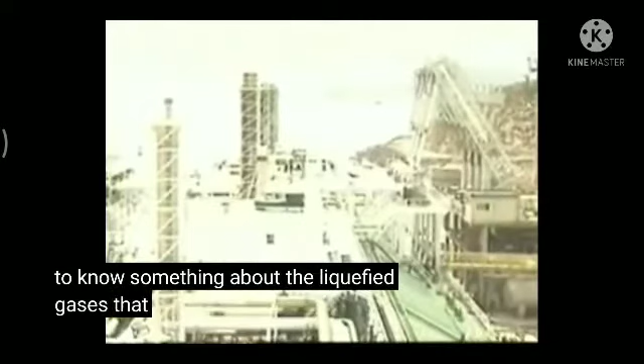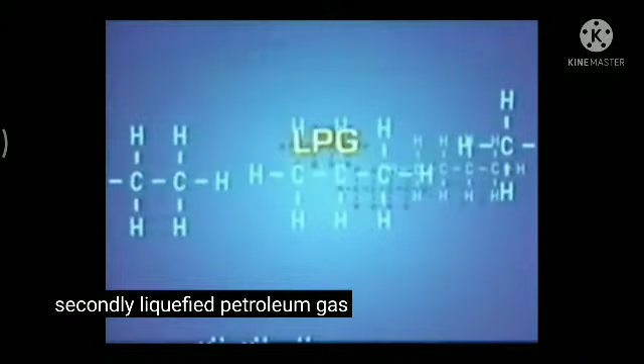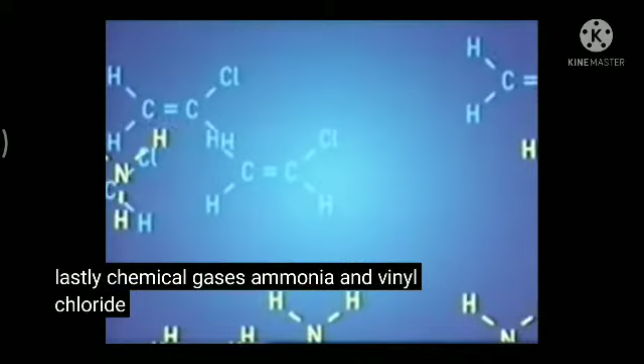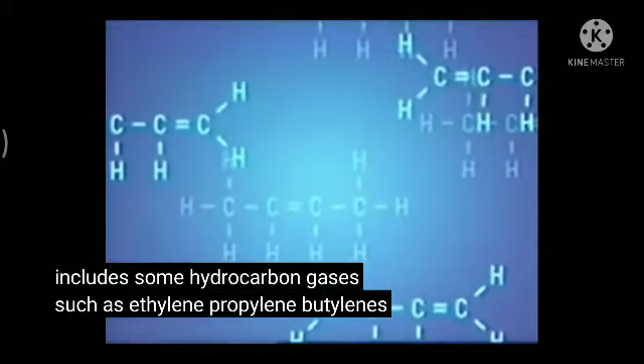To understand these ships, it's necessary to know something about the liquefied gases that they carry. There are several types of these gases. First, liquefied natural gas, LNG. This is principally methane. Secondly, liquefied petroleum gas, LPG. This is usually propane or butane. Lastly, chemical gases: ammonia, vinyl chloride monomer (VCM), chlorine and others. This group also includes some hydrocarbon gases such as ethylene, propylene, butylenes and butadiene.

Each of these gases has different properties and potential threats to personal safety. These are described in the materials data sheets that you'll find on board. The data sheet for the cargo being carried must be prominently displayed.

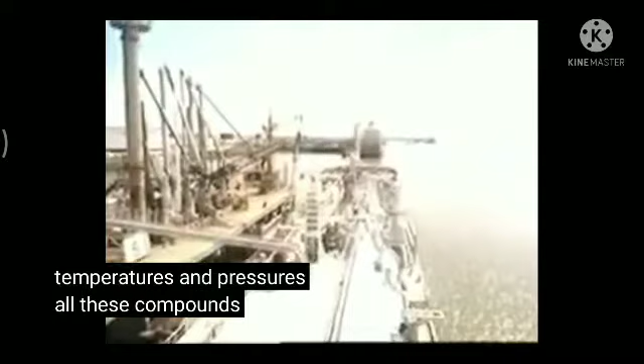These gases have different types of ship designed to carry them. One thing they all have in common is that under normal atmospheric temperatures and pressures, all these compounds are gases. Gases are liquefied for transportation because they occupy several hundred times less space as liquids.

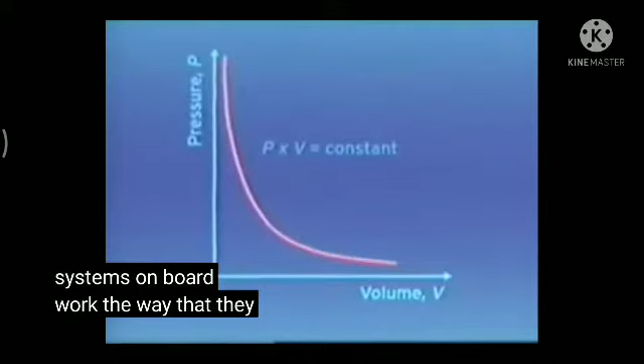Knowledge of the physical behavior of gases will help you understand why the systems on board work the way that they do. The most important thing for their transportation and handling is how these gases behave at different temperatures and pressures.

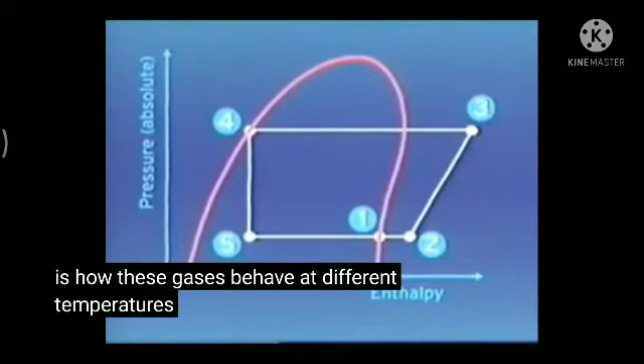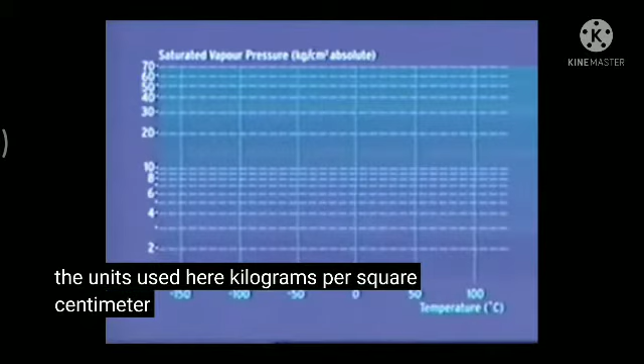This is often shown on a graph called a vapor pressure diagram. The temperature in degrees Celsius is shown horizontally, with the pressure vertically. For convenience, this is generally expressed as the saturated vapor pressure, SVP, on a non-linear scale. The units used here, kilograms per square centimetre, are equivalent to bar or normal atmospheric pressure.

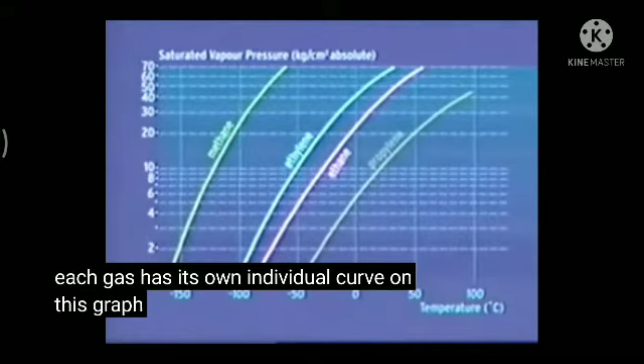Each gas has its own individual curve on this graph. Its SVP is the pressure exerted by the boiling liquid vapor of the gas within a closed container at a given temperature. Effectively, these are the conditions when the gas becomes a liquid and the liquid can become a gas.

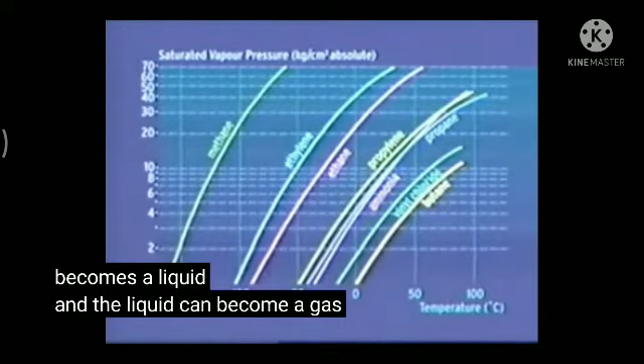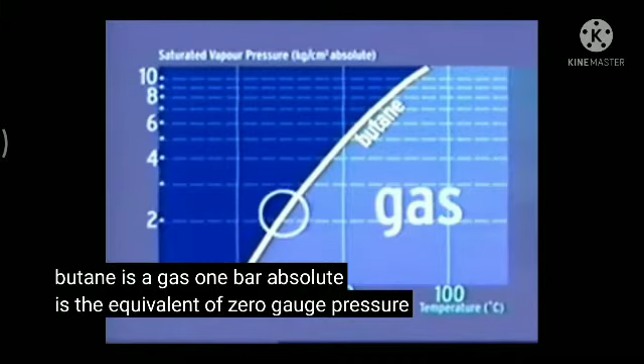This is the curve for butane. Under conditions to the left of the curve, butane is a liquid, and to the right it is a gas. We can see that at 0 degrees Celsius at 1 bar, butane is a gas. 1 bar absolute is the equivalent of 0 gauge pressure. If we go up the curve, we can see that a pressure of 3 bar is enough to keep it a liquid at temperatures of up to 30 degrees Celsius.

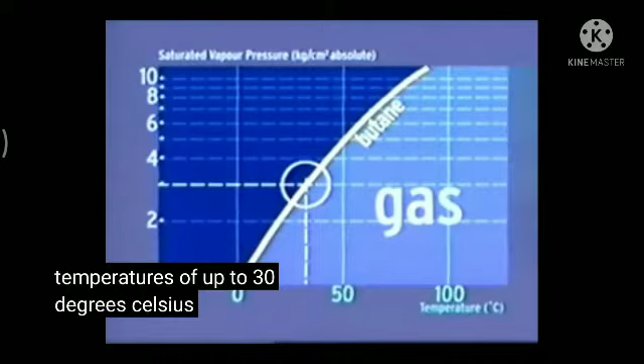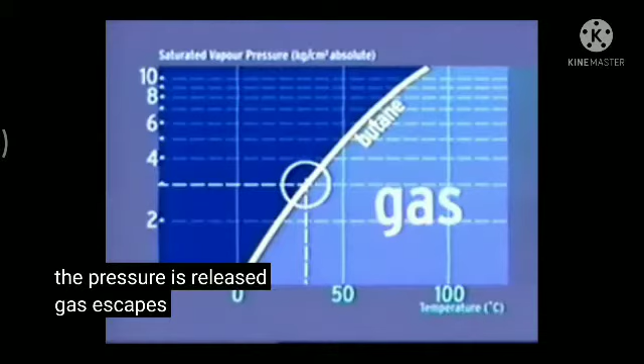This is the kind of pressure that exists in a disposable cigarette lighter, enough to keep the butane as a liquid. If the pressure is released, gas escapes. In doing this, you have effectively moved the conditions of the butane into the gas area of the graph.

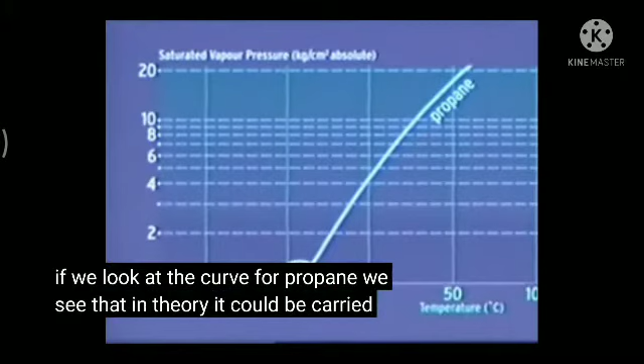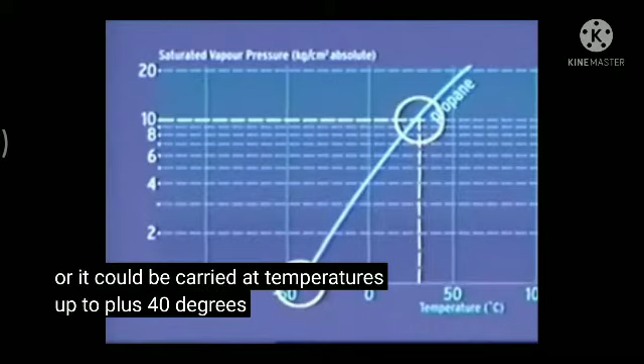These are the curves for other common liquefied cargoes: methane, ethylene, propane, propylene, ammonia and vinyl chloride. If we look at the curve for propane, we see that in theory it could be carried at atmospheric pressure if it is kept below -42 degrees Celsius. Or it could be carried at temperatures up to +40 degrees Celsius if it is kept at a pressure of 10 bar or more.

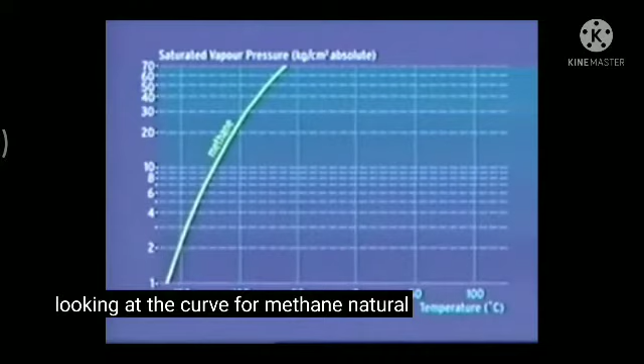Looking at the curve for methane, natural gas, we see that it will always need to be refrigerated, as even at a 40 bar pressure, it must be kept below -80 degrees Celsius to remain a liquid.

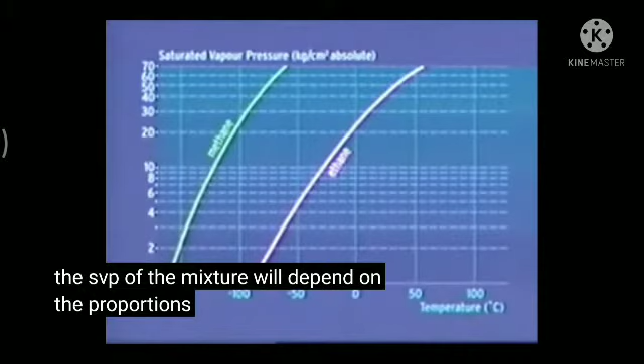Sometimes mixtures of gases are carried. The SVP of the mixture will depend on the proportions of the two gases in it. In a simple mixture of, for example, ethane and methane, the curve will lie somewhere between those of the separate gases.

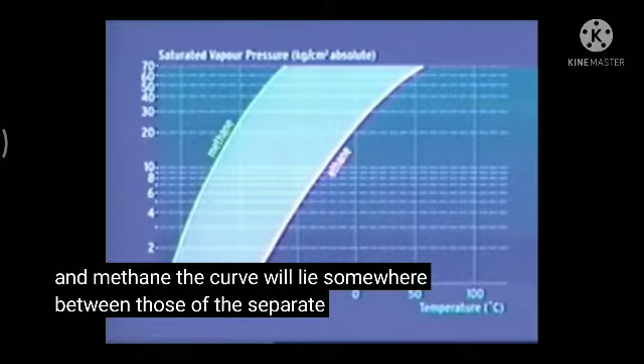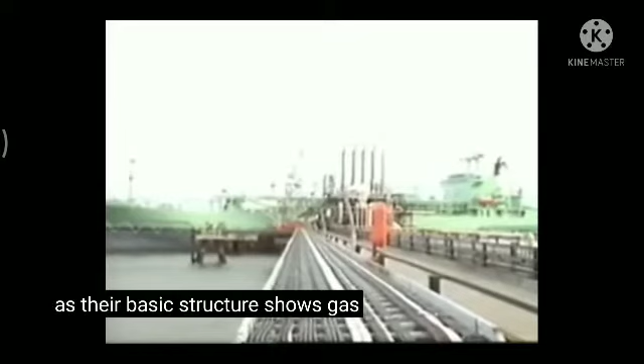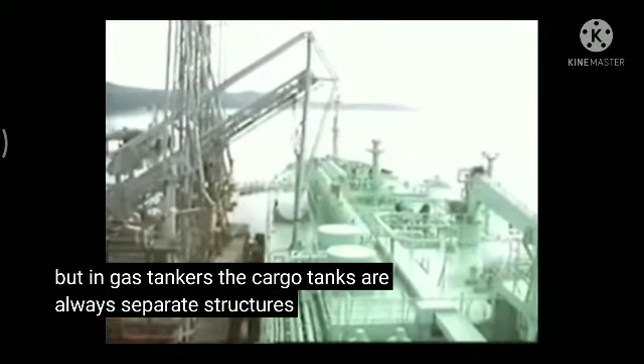As their basic structure shows, gas carriers were developed from oil tankers. But there are many differences. For example, in oil tankers, the hull often forms part of the cargo tanks. But in gas tankers, the cargo tanks are always separate structures inside the hull. Another important difference is that oil tankers always have inert gas in the vapor space above the cargo. In gas carriers, there is no inert gas or air at the top of the tank, only cargo vapor.

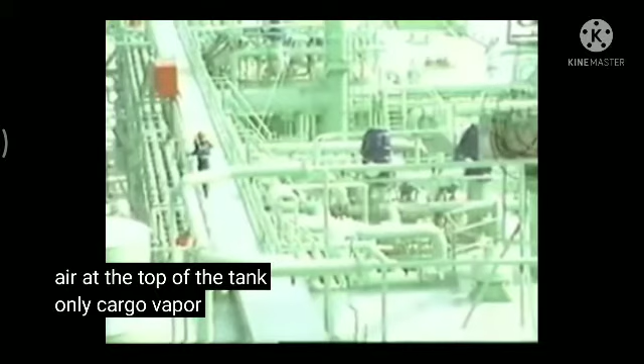The design and building of gas carriers must conform to the gas codes of the International Maritime Organization, the IMO. These codes go into great detail about all aspects of the design of the ship and their cargo tanks. The code specifies the maximum pressure and equipment required for different cargoes. A secondary barrier may be required to protect the hull from any leakage from the cargo tanks. This depends on the type of containment selected and the temperature of the cargo to be carried.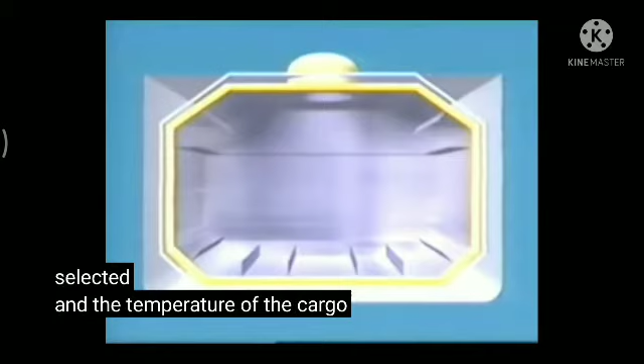All tanks are tested before they're used to carry cargo. The tanks have to withstand the large thermal stresses provoked by cooling down on loading after dry dock and warming up after gas freeing.

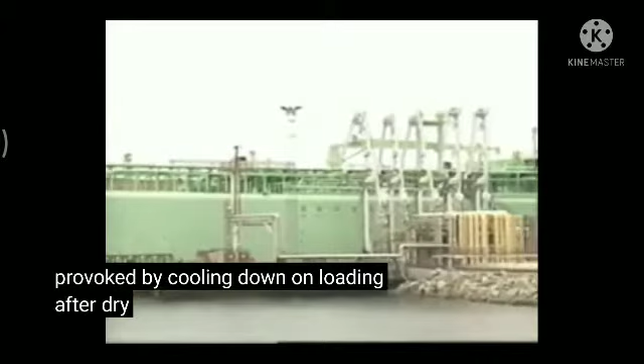But during cargo and ballast voyages, the tanks are usually kept at low temperature, often by retaining a heel, a small part of the cargo, on board. Some ships have specialized equipment to re-liquefy the cargo. Many are equipped with inert gas or nitrogen systems to inert the hold spaces around the tanks.

Liquefied gas carriers use a variety of cargo containment systems. The choice of system is determined by the temperature and pressure required by the cargo and the cost of suitable engineering to contain it. The reactivity of certain chemical gases will restrict the construction materials that can be used.

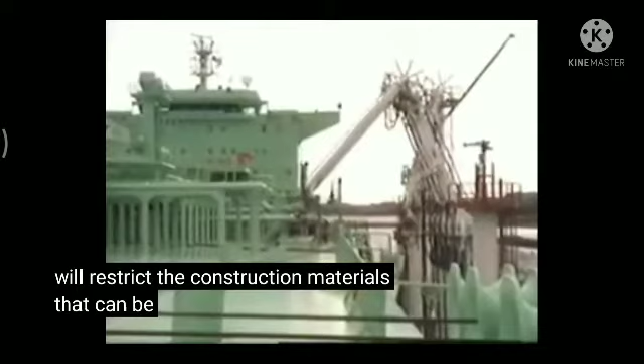The more you understand about your own ship, the better. Time spent studying the regulations and how your ship conforms to them, as well as how its special equipment is operated, is time well spent. In this video, we cannot deal with every liquefied gas carrier, only the most common types, starting with fully pressurized ships.

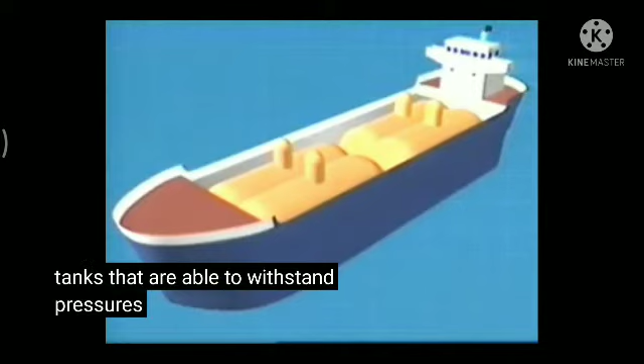Fully pressurized ships carry their cargo under pressure, but at ambient temperature. They're generally smaller than other gas carriers. They usually have cylindrical cargo tanks that are able to withstand pressures up to 18 bar, although on some ships the maximum is only 10 bar.

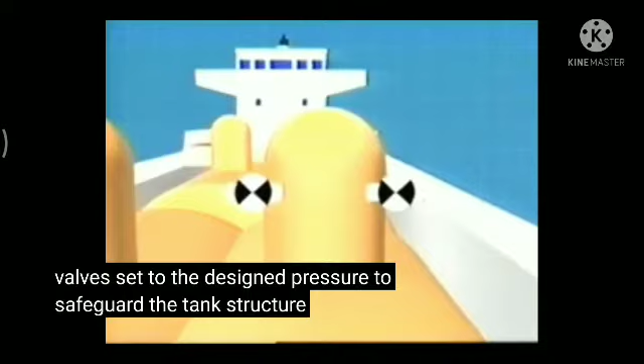These are called Type C tanks after their designation in the IMO IGC code. Like all tanks, they're fitted with pressure relief valves set to the designed pressure to safeguard the tank structure. The tanks of these ships are pressure tested. This is very reliable, so that the area around the tanks can be left filled with air.

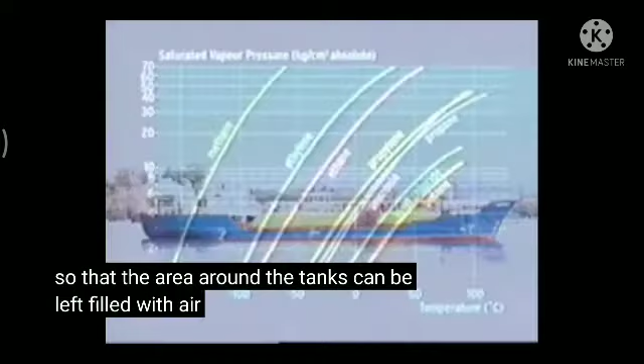As we can see from the graph, under a normal temperature range, from 0 degrees to 45 degrees Celsius, these ships are able to carry a wide range of cargoes, including LPG, propylene and ammonia. The cargoes that any gas carrier is permitted to carry are specified in the ship's certificate of fitness.

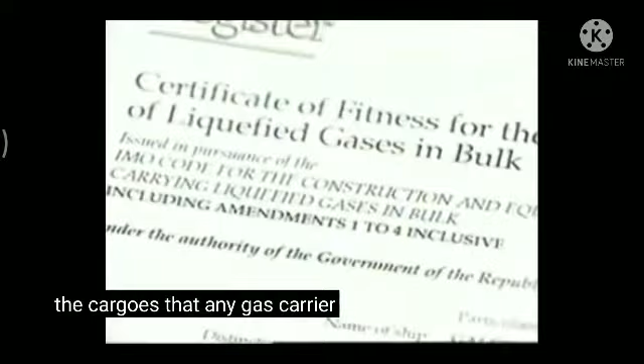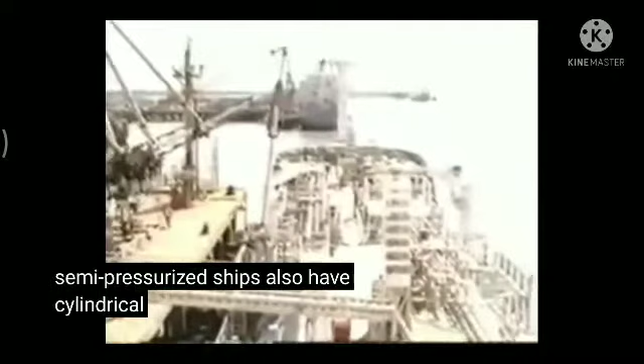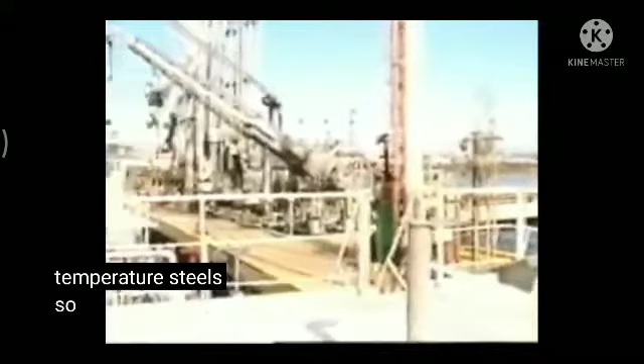Semi-pressurized ships also have cylindrical or bi-lobe cargo tanks. These usually withstand pressures up to 7 bar. Often the tanks are made of low-temperature steels, so that cargo can be carried at low temperatures, typically down to -48 degrees Celsius.

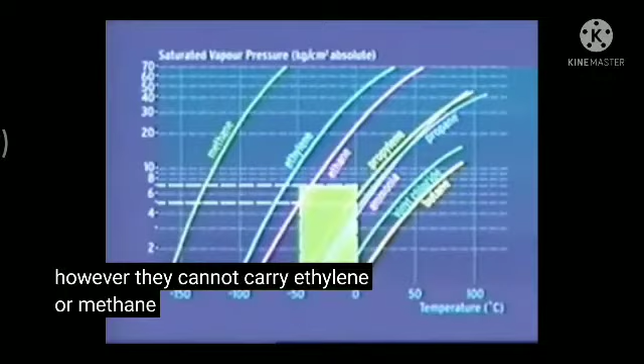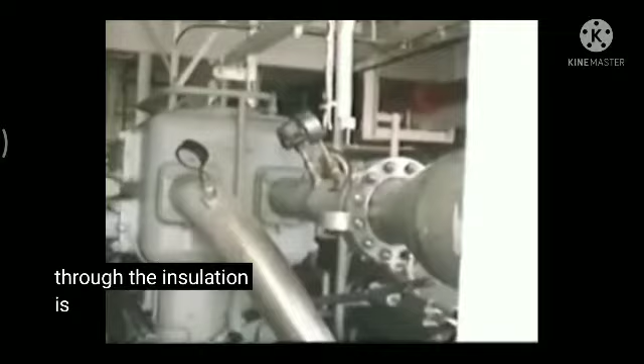From the graph, we can see that these ships are capable of carrying LPG and propylene. However, they cannot carry ethylene or methane. These ships are often equipped with reliquefaction systems. Heat getting into the cargo system through the insulation is removed by gas boiling off the cargo surface. This boil-off gas has its heat removed by the liquefaction plant and is returned to the tanks as liquid.

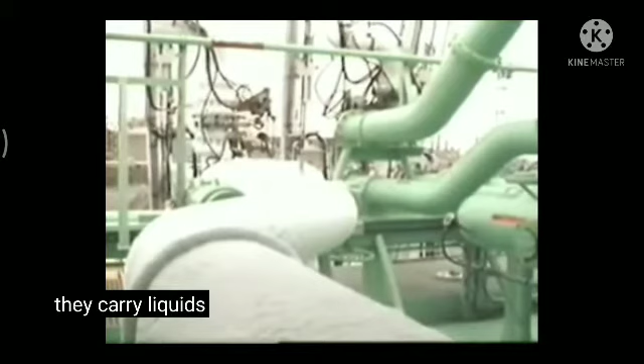There are several different types of fully refrigerated ships. They're generally used for carrying LPG or ammonia. They carry liquids at about atmospheric pressure, but at a temperature of down to -48 degrees Celsius.

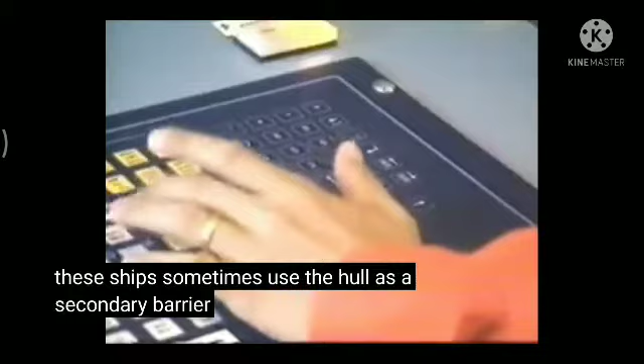Perhaps the most common type has prismatic tanks. These tanks are not round, but have flat sides. These ships sometimes use the hull as a secondary barrier, and often have inerted hold spaces to guard against the consequences of leakage. The tanks are made of low-temperature steel and are well insulated.

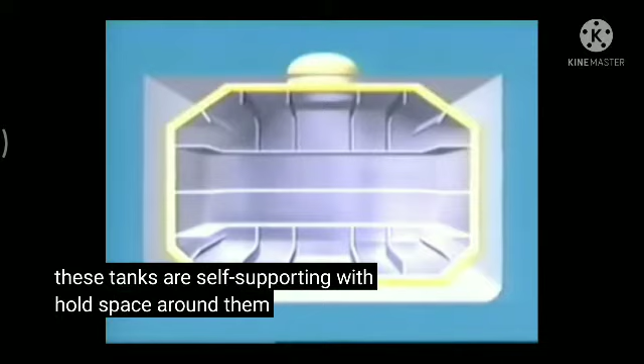These tanks are self-supporting, with hold space around them. They have substantial internal stiffening. Generally, wood blocks are used to provide insulation and support. There's usually a bulkhead in the middle to reduce the free surface effect of the liquid.

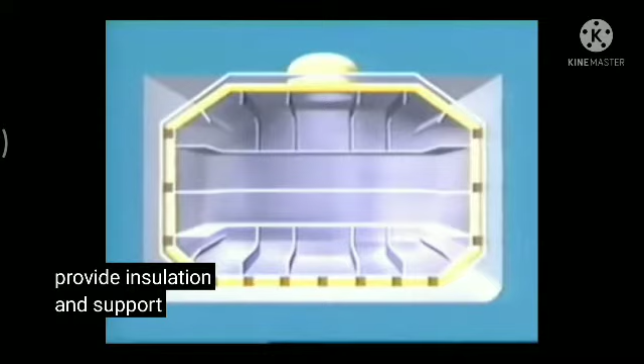Arrangements are made to ensure that the tank can expand and contract without damaging itself or the hull. The ship will have a double bottom and a secondary barrier capable of withstanding the low temperature of a cargo leak.

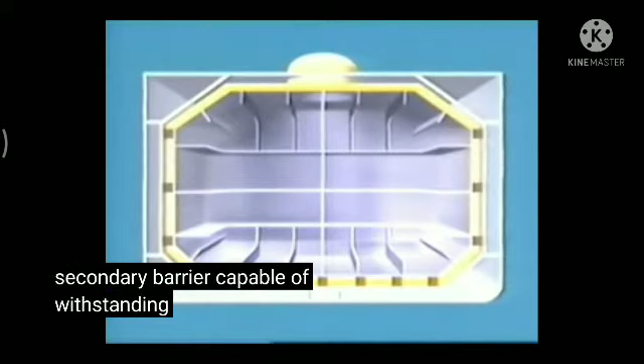If a section of the hull forms part of the secondary barrier, ballast will be carried in the double bottom and in tanks immediately below the deck. If the secondary barrier is a complete inner hull, then ballast is carried between the inner and outer hulls.

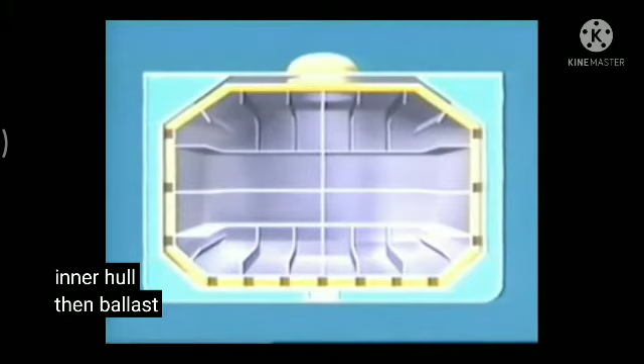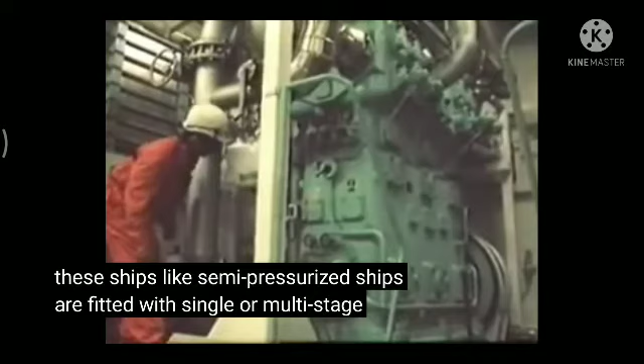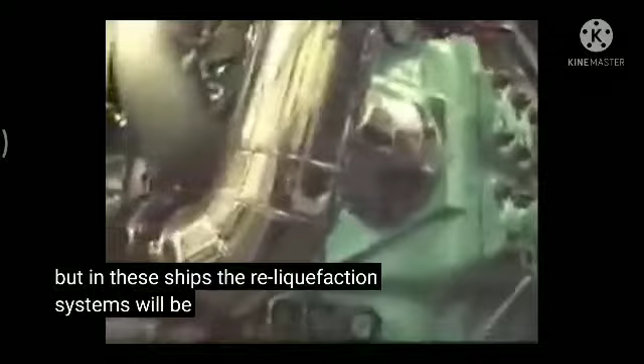These ships, like semi-pressurized ships, are fitted with single or multi-stage reliquefaction systems to return any cargo boil-off to the tanks. But in these ships, the reliquefaction systems will be large. The ability to liquefy the cargo means that these ships do not need to retain cargo to keep their tanks cold, giving larger cargo outturns.

LNG ships are very specialized ships. They carry the liquid methane at about -160 degrees Celsius at atmospheric pressure.

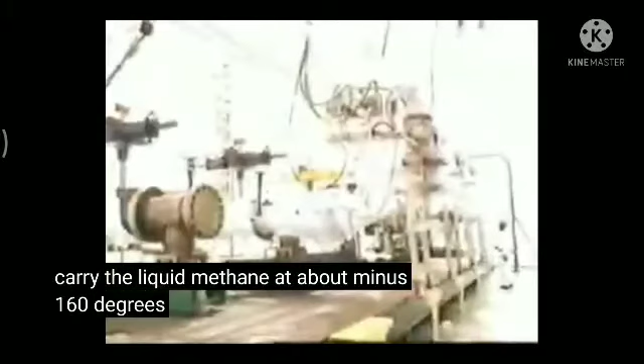As this demonstration shows, the structure and the strength of steel are altered by these low temperatures. Steel becomes brittle. So any liquid gas spilling onto the mild steel of the hull or deck could have serious consequences. The tanks are often made of aluminium or special steel.

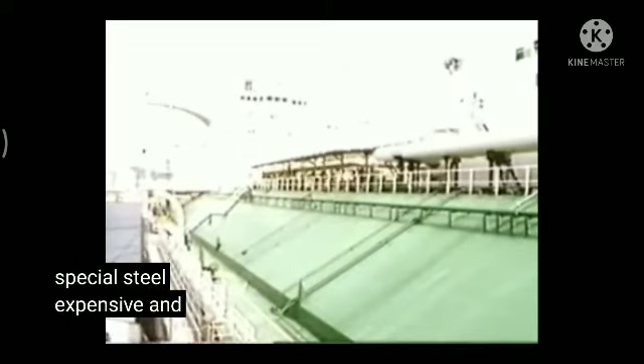Expensive and specialized engineering is required to carry cargoes at these temperatures. Several different designs have been developed to overcome the challenge.

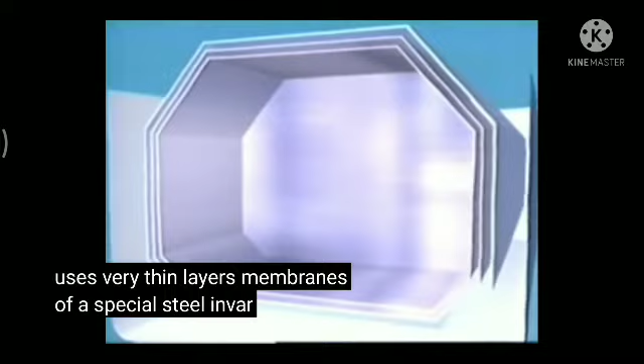One design, the Gaz Transport system, uses very thin layers, membranes, of a special steel, invar. This expands and contracts very, very little. The steel is typically about 1 millimeter thick. There is always a second membrane providing a secondary barrier.

The spaces have plywood boxes filled with perlite insulation to support and insulate the tanks. Generally, these spaces are held under slight positive nitrogen pressure.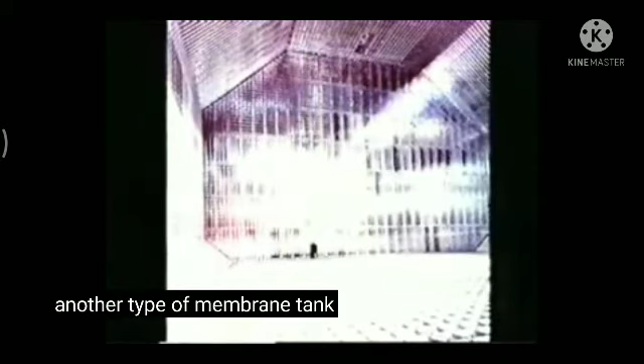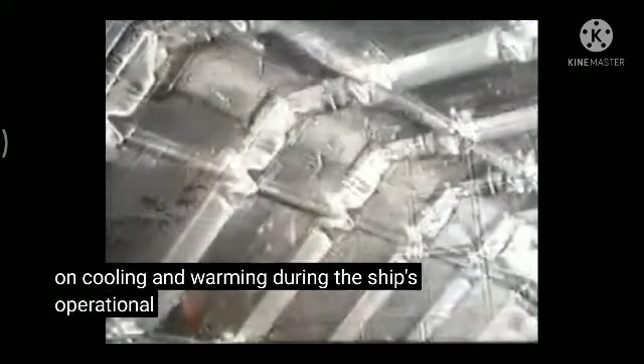Another type of membrane tank, the Technigaz system, uses an internal structure called waffles to allow for the expansion and contraction required on cooling and warming during the ship's operational cycle. There is always a secondary barrier, often a sandwich of aluminium foil and glass cloth. Balsa wood, or cellular foam, is used to support the tanks and provide insulation.

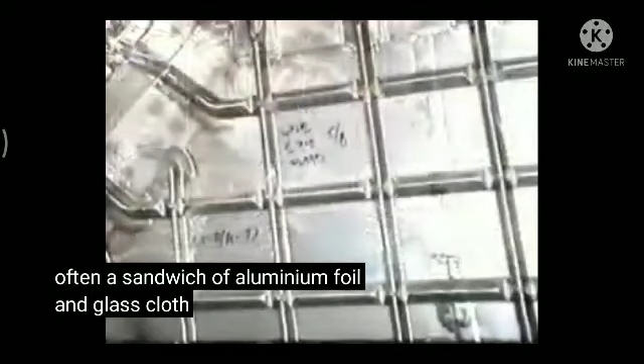Another design, the Moss system, uses spherical aluminium tanks. These tanks are self-supporting and are secured around the equatorial ring. All pipework and equipment is carried in a central column.

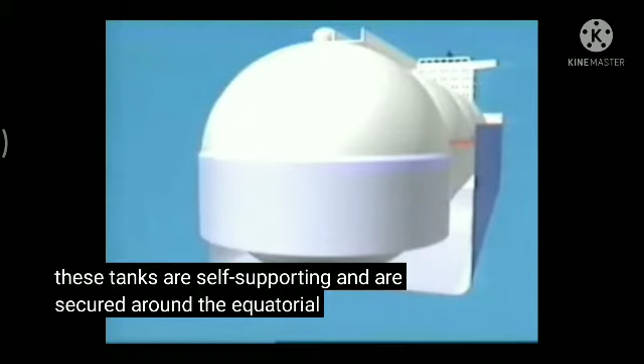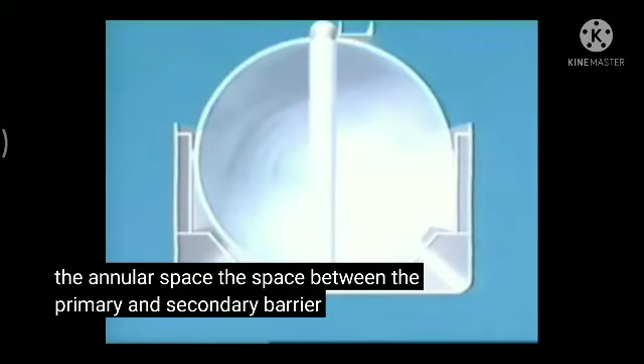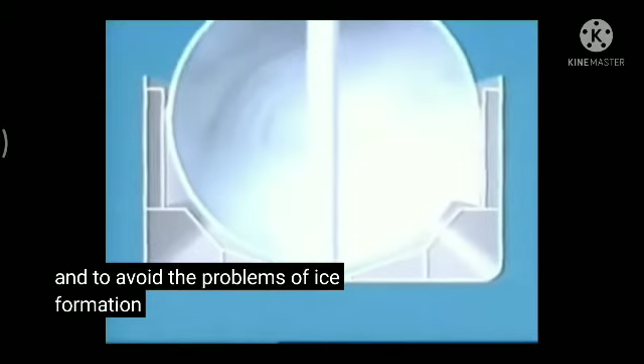The annular space, the space between the primary and secondary barrier immediately around the tank, is filled with nitrogen to ensure that the space is inert and to avoid the problems of ice formation. There is always a drip tray underneath to catch and vaporize any possible leakages and protect the hull.

Ballast is carried below and alongside the cargo hold. The tanks are always protected by weather covers, so that's what is visible, not the tanks themselves.

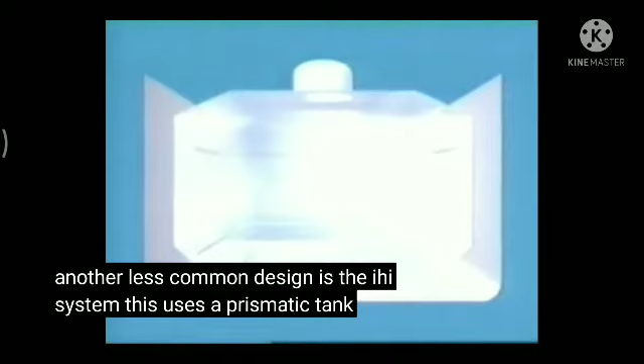Another, less common design is the IHI system. This uses a prismatic tank made of aluminium. All LNG ships have double bottoms that provide ample ballast space.

Because of the properties of methane, a lot of energy is needed to re-liquefy it. So most LNG ships do not have re-liquefaction equipment. They retain part of the cargo which is sprayed into the tanks to keep them cool on the ballast voyages.

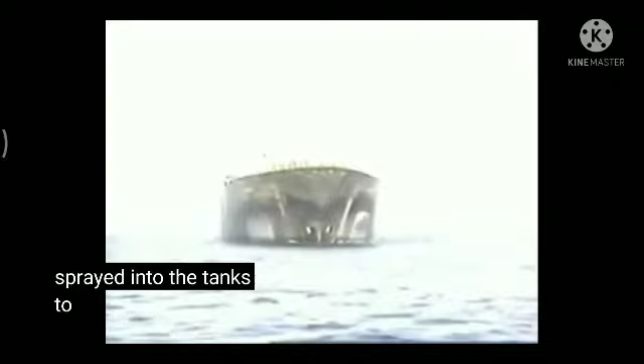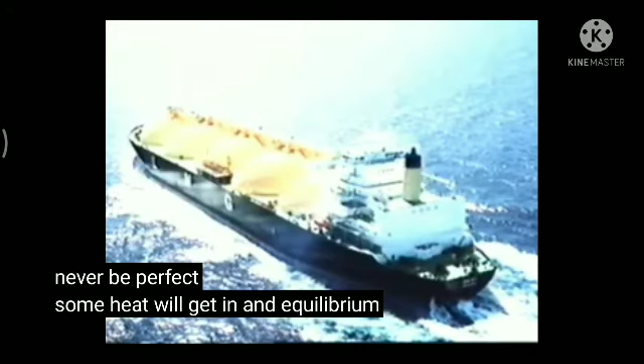As the heat insulation of the tanks can never be perfect, some heat will get in, and equilibrium can only be maintained by cargo boil-off. This inevitable boil-off is used to power the ship, and the ships are designed around this. As it's easier to burn gas or gas and oil mixtures in a boiler, most LNG ships have steam turbines.

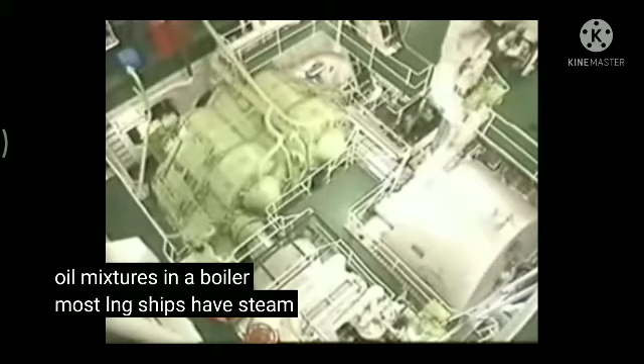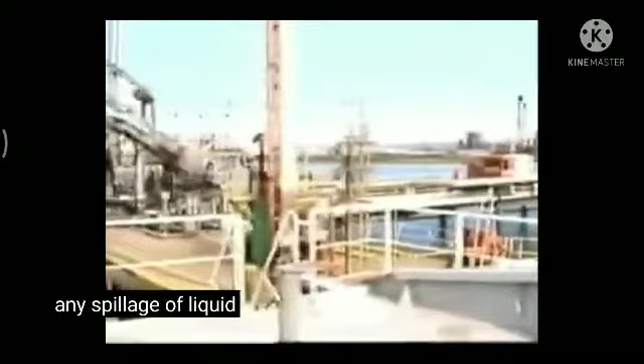Any spillage of liquid cargo will lead to a potentially dangerous gas cloud. The main hazards are intense cold, injuring personnel and damaging the ship's structure; toxic fumes, asphyxiating or poisoning the personnel and the environment; and finally, perhaps the worst of all, fire.